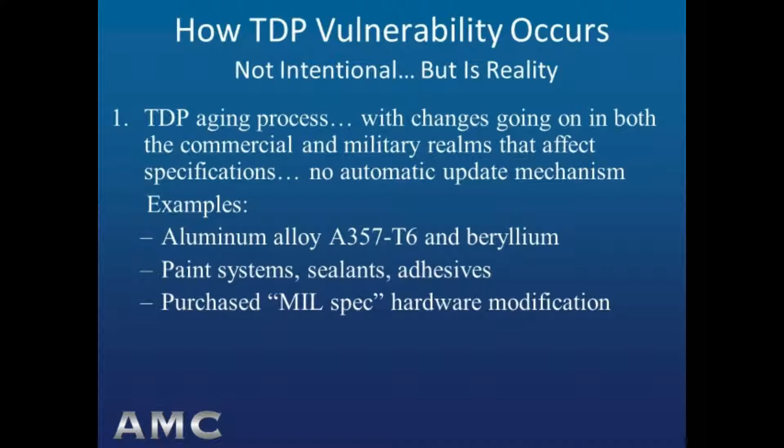The second reason for TDP vetting responsibility falling on cold start new awardees is the lost documentation phenomenon. Among casting dimensional requirements, especially and for any kind of casting, commercial or military aerospace, new designs or legacy designs, there are exceptions and waivers granted for the unique anomalies on the casting surface that don't find their way into drawing revisions and permanent records in the TDP. So, a cold start new awardee, the first article inspection lab, and even the engineering support activity may be unaware of a dimensional deviation having been acceptable in the past, but undocumented. It becomes a non-conformance on a newly produced legacy casting when it had not been a non-conformance in past buys, months or years ago.

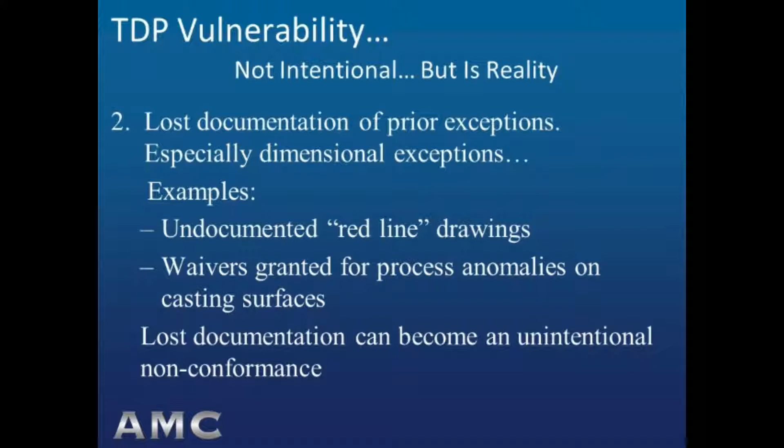As our teammate Keith Sturgill pointed out in his segments in both webinars 1 and 2, a cold start new awardee should assume nothing with regard to undefined dimensions, revised specifications, measurements before or after coatings are applied, commercial availability of specified alloys, definition of critical characteristics, and more. The purpose of these case studies, which are at a high level and brief, is to be specific about situations that have come up in first article inspections in the past and have resulted in non-conformances. The dimensional non-conformances are typically the most difficult to resolve and usually result in the new awardee having to resubmit a second first article at the awardee's expense.

Our CAST-IT teammate, Mike Gwynn, who specializes in casting design and the manufacturing engineering of casting designs to meet specifications, will summarize several casting non-conformance examples formulated generically, but based on actual DLA legacy casting first article nonconformances. Thank you, Julia. In the context of first steps to launch a legacy casting from a cold start by an awardee who is commonly now a machine shop, let's take a look at 4 case studies of situations that had a problem and what could have been done to prevent it.

Our first case study is a cast ductile iron engine cradle for an Army ground vehicle. The case study issue is which has priority dimensionally, an allowable 2-degree draft per a drawing note, or the plus or minus tolerance on a linear dimension specifically identified on the drawing and affected by draft.

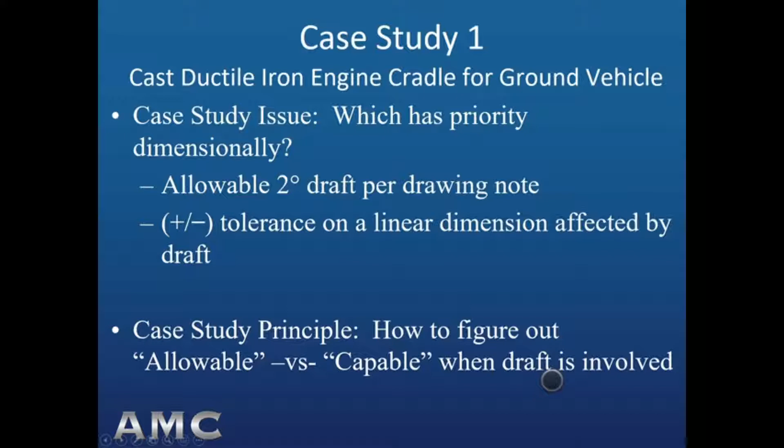And we'll also look at another issue that comes up. What about this? A drawing note that says draft to be additive, along with another note less specific about the tolerances involved in a specific dimension: unless otherwise specified, dimensional tolerances to be plus or minus some fraction of an inch. So let's begin looking at the details.

Well, here we have this engine cradle in an isometric view with a bounding box around it. It's about 24 inches wide, and the area that we're going to be looking at dimensionally from a standpoint of a critical dimension is the width of the cradle underneath the engine.

The 2 holes are for engine mounts with an elastomer between the engine and the cradle. And the width underneath the engine is an important dimension because there are accessories on the engine that we want to be sure that there is clearance.

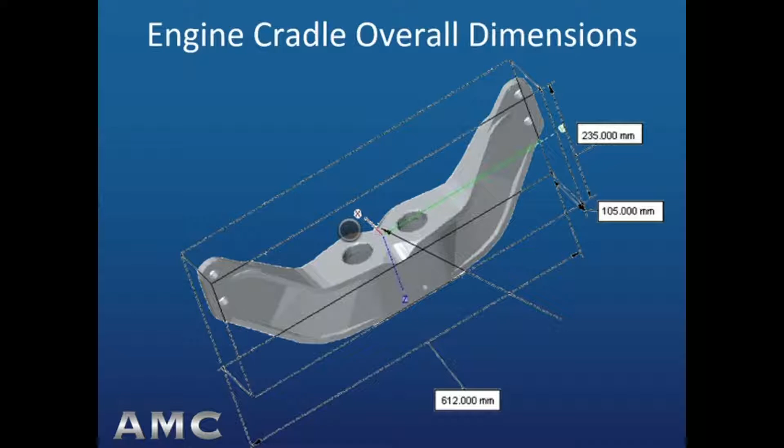If we look at an isometric view from the bottom, we see that there's a cavity at the bottom for lightweighting, and there's ribbing underneath. You can see also I-beam flanges on the top and bottom along the sides.

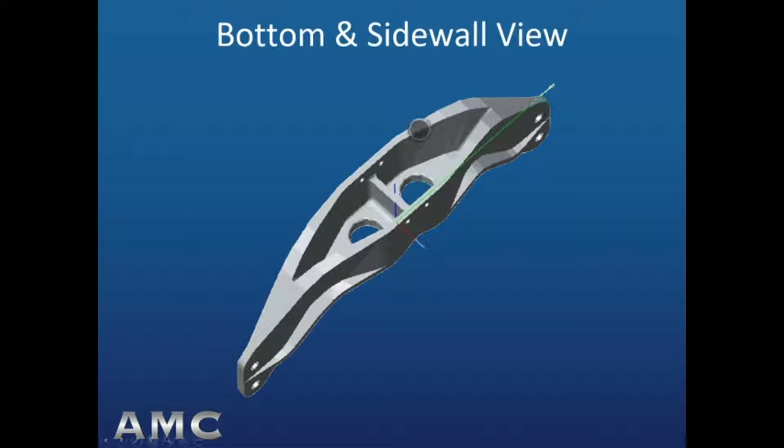So one strategy to make this casting would be to have a vertically parted mold to mold out that cavity in the bottom, but the sidewalls created by the I-beam flanges top and bottom create backdraft, and we'd have to have cores along the sides in order to accomplish a vertically parted mold. But there still may be advantages in taking a look at that approach.

So let's look at a vertically parted mold with those slab cores to fill in the sides where we have backdraft from those I-beam flange features. And here we have it. We have the casting now oriented with the pocket down below so that we can draw it out of the sand more reliably.

The pink line is the parting plane of the mold, and filling in those pockets created by the I-beam flanges top and bottom are the yellow features, which are slab cores. Those 4 slab cores, because of symmetry, can be formed by just 2 core boxes. So it's a fairly economical way to make the casting because the ability to mold out the bottom pocket has advantages.

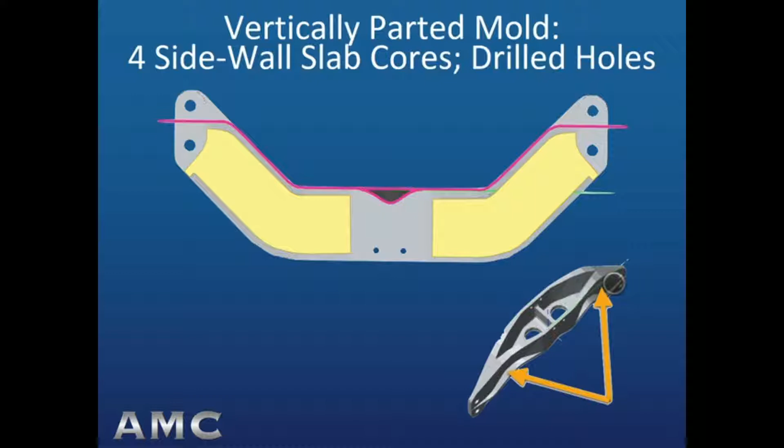Well, the dimension that we're interested in is across the bottom there of the view that we're looking at, which is actually the top where the engine sits on the cradle. And the draw length that creates the draft that affects that feature is 100 millimeters.

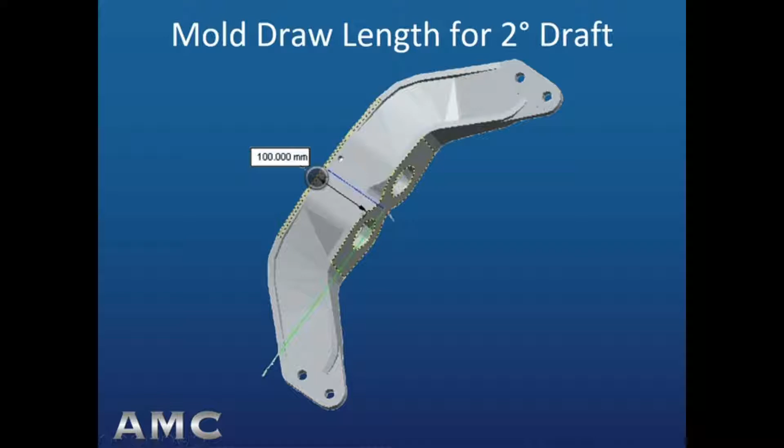So the draft offset for that 2-degree draft along that draw length of 100 millimeters is illustrated here, where we now see the cores. The cores have draft on them as well. And you can see in green the offset that is created by that 2-degree draft over the 100 millimeter draw length. And that's 100 millimeters times the tangent of 2 degrees, or 3.49 millimeters,

but it occurs on both sides of the casting. So we have a total width increase of the casting thickness of almost 7 millimeters as a consequence of draft alone. And that's against 105 millimeters plus or minus 4.

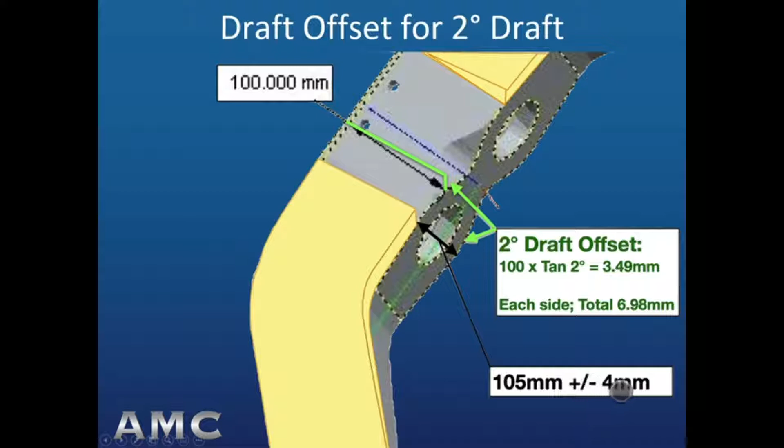In terms of tolerance capability for a casting like this, focusing on air set in the green box with well-designed and well-constructed tooling, we could get plus or minus 3 millimeters for a casting of this size in terms of mold capability, since the dimension is all on one side of the mold, being a basic dimension with no degrees of freedom added to the tolerance capability inside the mold.

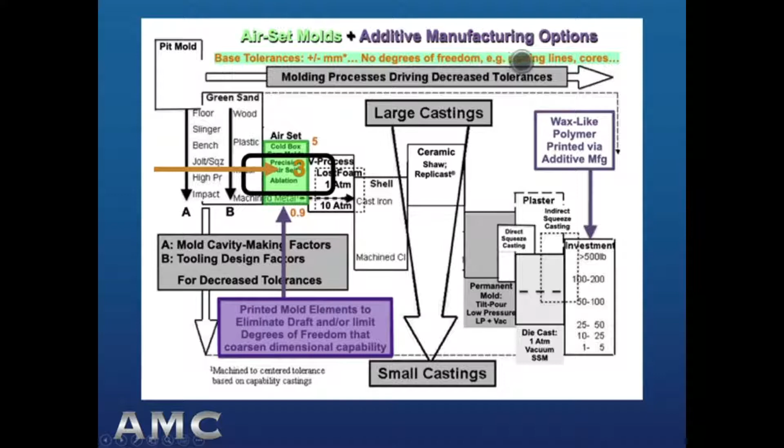So now we have, at best, the mold cavity capability dimensionally at plus or minus 3 millimeters on top of the draft that has already widened the feature by a total of almost 7 millimeters.

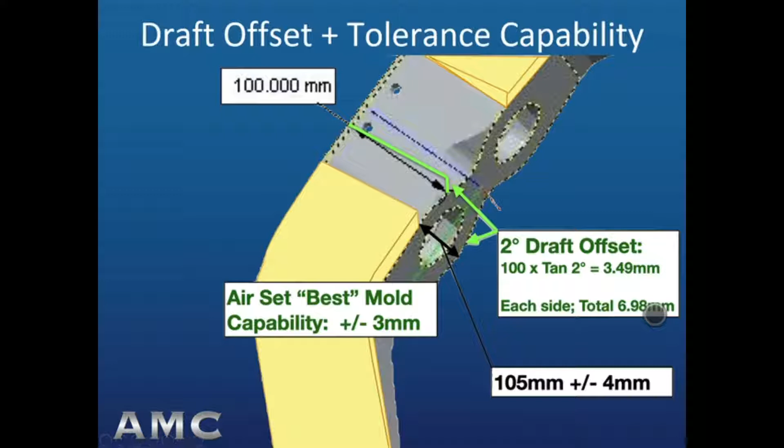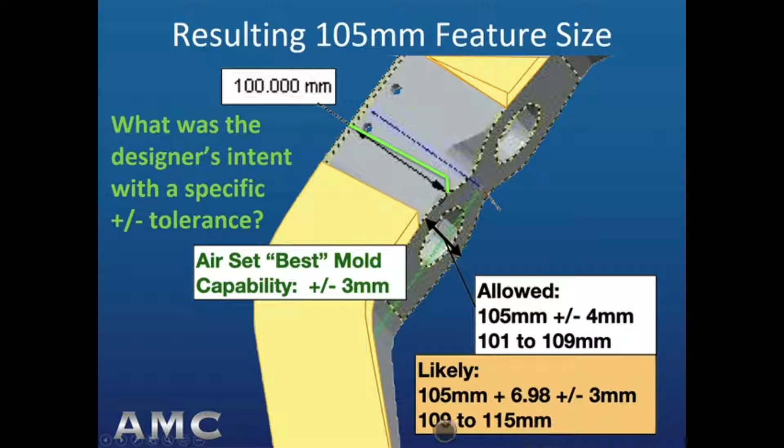So when we look at the resulting 105 feature size, we now see that we're allowed 105 plus or minus 4, which would be 101 to 109 millimeters, but it's likely we're going to wind up with 105 plus the 7 from the draft on each side, and then the plus or minus 3 millimeters of the mold cavity making process capability, or in other words, grand total of 109 on the small side to 115 on the high side.

That's not likely to be within the design intent of the engine cradle, where accessories and other clearance issues would be right below where the engine mounts on the cradle. Well, let's look at the other situation where we don't have a specific call out for that 105 dimension, but we do have a note that says draft is to be additive, and then the note that would cover the width of the engine cradle in this case would be unless otherwise specified plus or minus 4 millimeters.

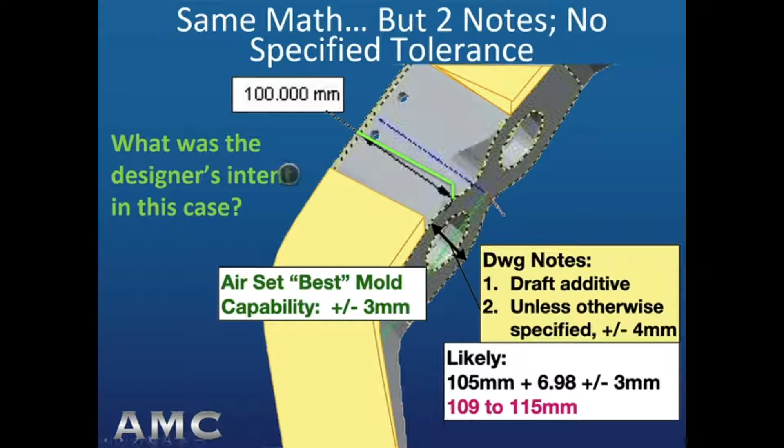So again, we have the same math. So we have the same situation in terms of the 109 on the thin side to a maximum of 115 millimeters across the top of the engine cradle, right where the engine sits upon it. So what's the designer's intent in this case? Well, when a designer puts draft to be additive as a note on the drawing, that's a structural design intent. The idea there is to make sure that walls which have structural capability as part of their design are not thinned down and lose their ability to carry the load case just because of the way draft was formed.

So in this case, we're looking at draft being additive as preferred structurally, but the designer's intent on the overall casting profile would not likely be pleased with the idea of 115 millimeters width right underneath the engine as it sits on the cradle. So our vertical tooling design option has a lot of risk associated with it for first article approval. We can be 95% sure that the 105 plus or minus 4 millimeters will fail.

And we can be more than 50% sure that our favorable interpretation, looking at those two notes in our favor for our vertically parted tooling design, that the draft additive is really a structural design issue, and then the just general otherwise specified plus or minus 4 millimeters is not specific to an engine clearance concern, but the engineer wasn't expecting a result that would be plus 11 millimeters on the wide side and plus 3 millimeters on the narrow side of any feature across the design.

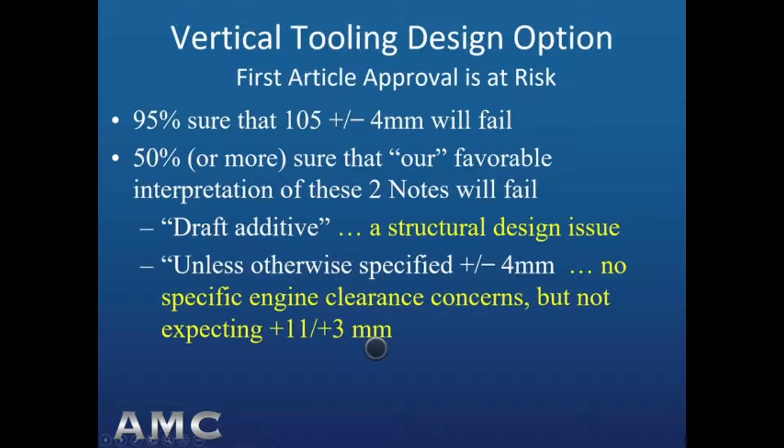Well, are there other tooling design options? What about a horizontally parted mold with a traditional core to form the center cavity and the motor mount holes, or horizontally parted with a 3D printed sand core? Let's take a look at that. Well, here's what that option would look like. The 2-degree draft still exists, but it's on a different surface. So we see the parting plane now of the horizontally parted mold cavity above, and then we see a slice through the mold cavity showing the lower half of the cavity and the parting plane in pink.

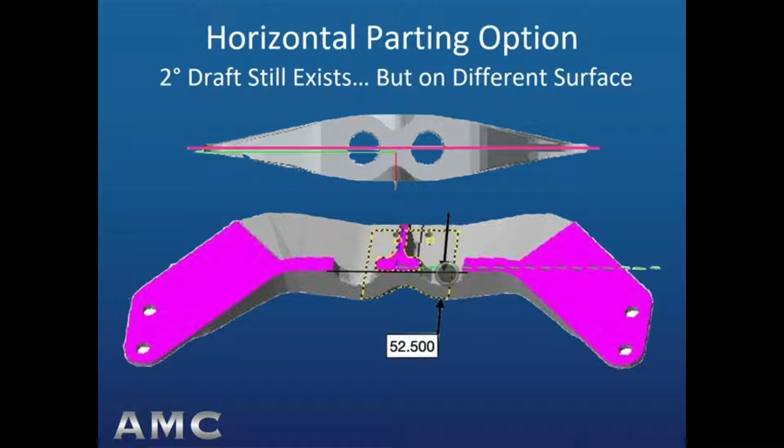And we now have 52.5 as the half of the dimension of the 105 that was a concern for us before. There would be draft on that surface, but that's not the surface that is of concern. The 100 millimeter draw length created a lot of draft that made that 52.5 on each side quite a lot larger. Well, now we don't have that issue. There's draft on that 52.5, but it's in the other plane. So the draft that does exist is going to be machined off because the 2D drawing calls for the motor mount holes to be spot faced, as we see there in green.

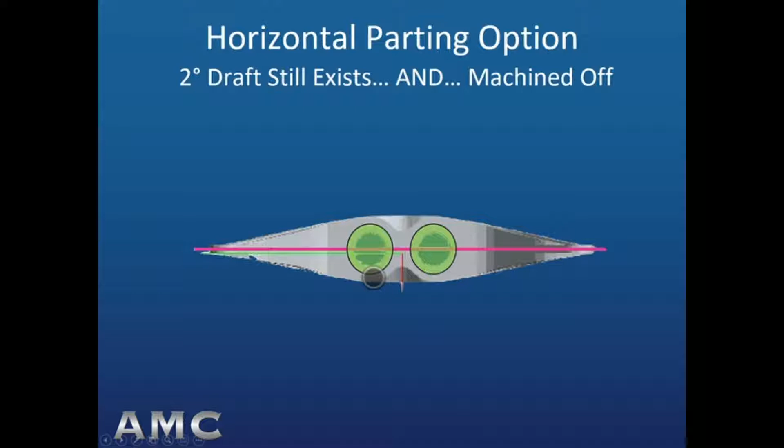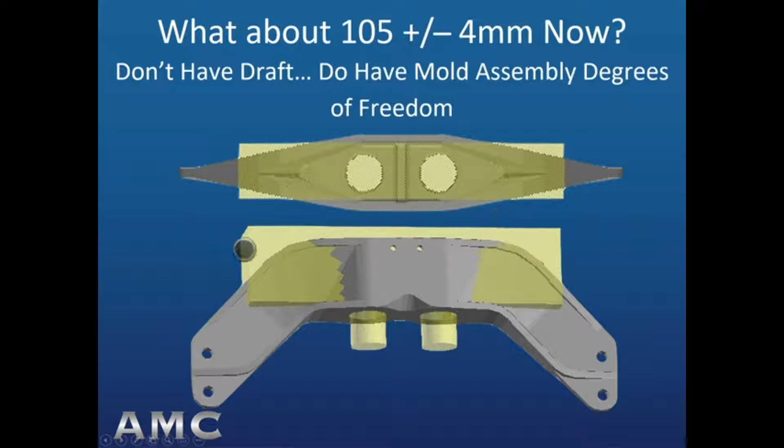And in the lower example where we have a top view that's been tilted a little bit, you can see the core that forms the motor mount holes and forms the inside cavity of the upper part of the engine cradle actually could resist the closing over of the top half of the mold on the bottom.

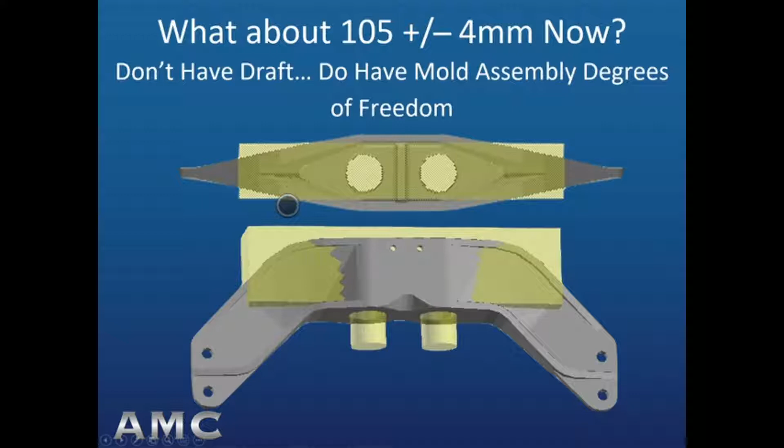So as a consequence of that close over and the parting plane, we have a coarsening of that 3 millimeter capability of the air set process with good tooling and a mold cavity of this size. So the consequence of that would be that we have 1.3 times that plus or minus 3 millimeter base tolerance capability, or plus or minus 3.9 across the parting line and across that core. And we're allowed 105 plus or minus 4. We don't have any draft involved.

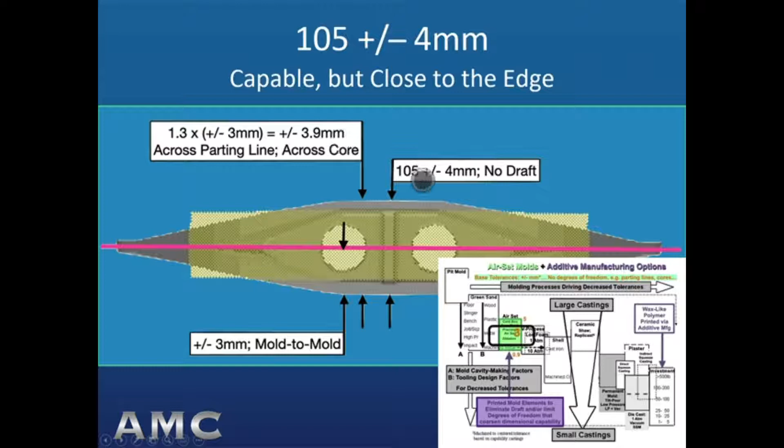And you can see that from our tolerance chart that we got our plus or minus 3 from the air set mold process for a casting this size with well-constructed tooling. So our process is capable, but at 3.9 of the 4 millimeter allowed tolerance, we're close to the edge. So what else could we do? We could do 3D additive manufacturing of that core. There would be no draft. There would be no degrees of freedom in creating a complex core, as we can see here.

I'll explain all that's involved, but in the upper view, you can see that in green now, because the 3D printed cores have kind of a greenish gray color compared to normally cores made in sand have kind of got a yellowish buff color. So we could wrap with the 3D printing process, since we have such great dimensional capability, so much geometry capability with the 3D printing process for cavities and reentrant angles and all kinds of offsets and geometry inside a core's geometry.

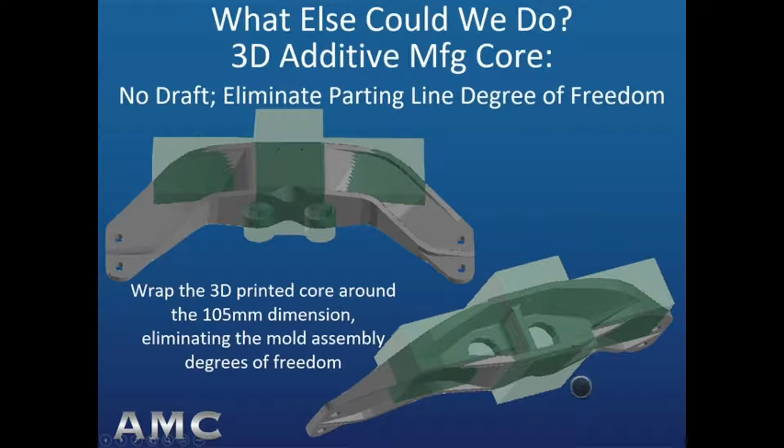We could wrap that 3D printed core around the 105 dimension and eliminate the mold assembly degrees of freedom entirely. And so that's what you see with kind of the center addition to the core's width, is it just basically wrapping around the outside of the casting to eliminate the possibility of the closing of the mold having an effect on that 105 dimension. So with a printed core, we have better tolerance capability. Now we're at plus or minus 2.

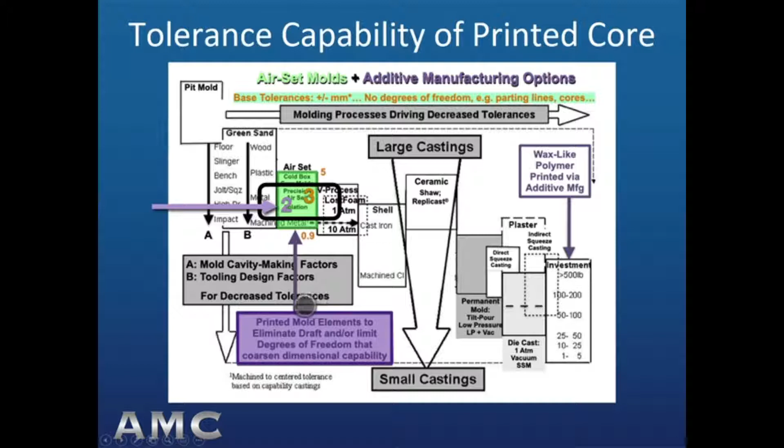So at this point now we have 105 plus or minus 4 allowed, and with the printed core wrapping around all of the important features, we have 105 plus or minus 2. So we have tolerance capability now with margin to spare. We have a robust situation, we might say, statistically. Well, one more thought. This is a legacy casting. We can't change the drawing. We can't change the fact that the motor mount holes on the top side of the casting are spot faced.

But if it were a new casting design, a little more geometry in a 3D printed core comes essentially at no charge. So why not increase the diameter of the core prints at the bottom interface between the casting and the mold cavity? And that's what I've expressed there in yellow, is the fact that the core print could get wider, and then that wider diameter at that point would essentially make what amounts to a spot face for the motor mount cushions or the motor mount bushings.

And with the tolerance capability of plus or minus 2 millimeters, that for an elastomer sitting against that surface is plenty good enough. And if it wasn't, you could take a cup grinder in the foundry finishing process and just kiss those surfaces with a circular cup grinder and make them for sure dead flat.

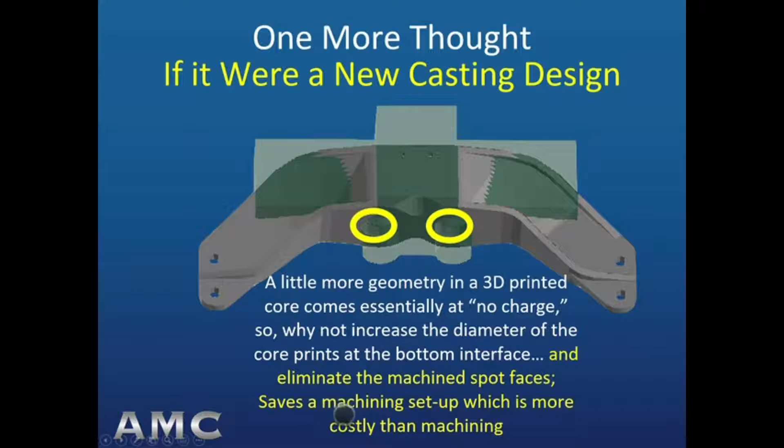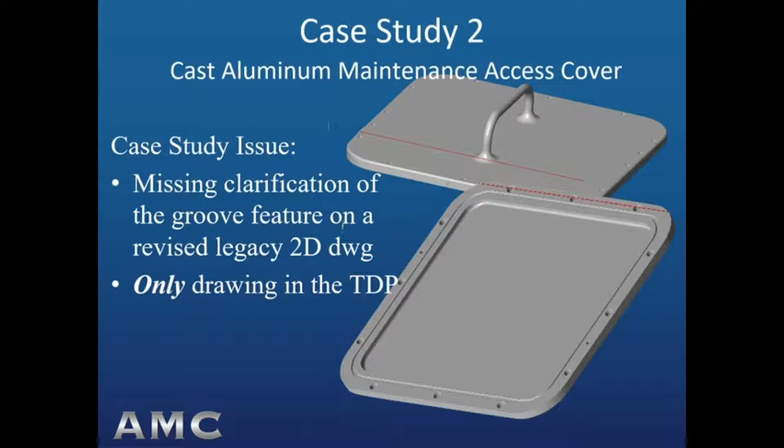Well, now let's take a look at another case study. This one is an aluminum maintenance access cover. And the case study issue is missing clarification of the groove feature on the revised 2D drawing. And it's the only drawing in the technical data package. So the drawing that's in the technical data package has a note that's missing on the revised drawing that was on the original drawing, but of course, a cold start new awardee would have no idea that that is missing, as well as the responsible engineering authority that approved that drawing when it was revised didn't notice it either.

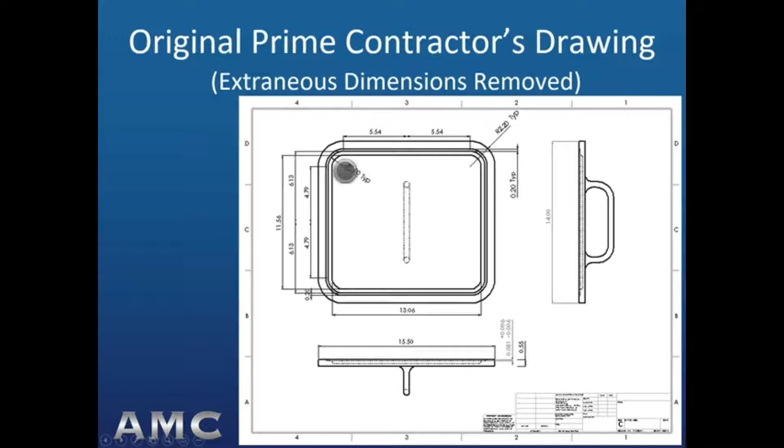So here is a drawing with some of the extraneous dimensions removed, and we'll take a close-up at the dimension of the groove in question. So we see here circled that the outer radius of the groove feature and the inner radius are shown as typical, and then the width of the groove all the way around is shown as typical on the original drawing, which we don't have.

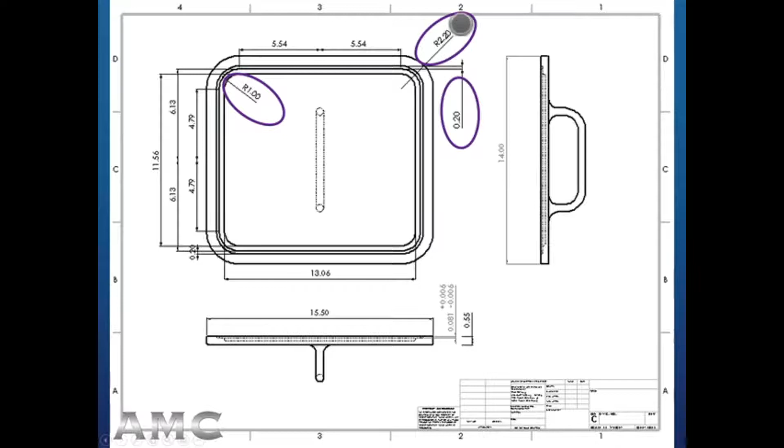What we do have in the technical data package is this, which is essentially the same drawing, but whoever did the revision for some other reason, perhaps a change in the anodizing specification or some other unrelated dimensional issue, was the reason for the drawing update. But in the process of making the drawing update, the typical note on those 3 dimensions was accidentally, apparently, left off.

But it's the only drawing we have, and as we've talked about, particularly in Keith's part 2 of this webinar series, the technical data package is what it is, and as the cold start new awardee, you are obligated to comply with the TDP without regard to whatever may have been in the TDP in the past. That's not known. So what would be the logical course of action for a cold start new awardee?

Well, from the size and scale of the hand-drawn groove, it's obvious that the designer intended for the groove to have a constant width around the perimeter and in the corners. Knowing the purpose of the groove is to seal the cover against the housing, a constant width elastomer seal, like a big O-ring, just basically rectangularly shaped, would be placed in the groove. So differences in the groove width in the casting might compromise the seal efficiency.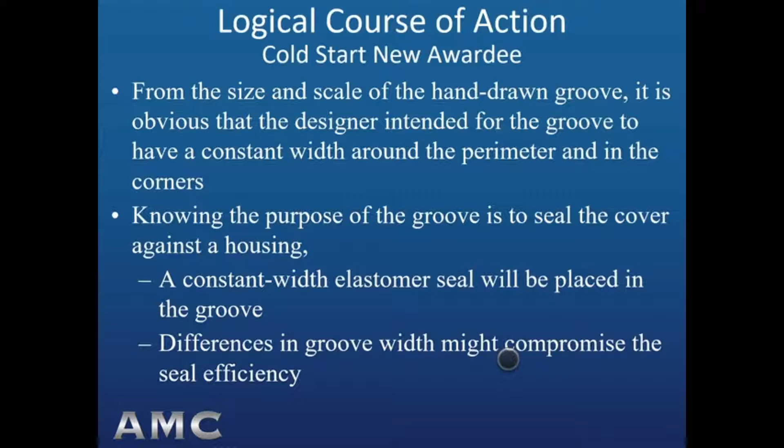So it's obvious that that groove needs to be the same width all around the corners and on all 4 sides of the drawing. But pursuing an engineering change to the drawing through the contract officer to the cognizant engineering authority at the governing DoD site would evaporate the first article production lead time. So for everyone's benefit, proceeding dimensionally with what is obvious seems to be the prudent choice.

Well, what actually happened? The first article was conditionally approved, but production couldn't begin until the dimensions of the groove were clarified. Well, you can't clarify the dimensions without a revised drawing. So the choice is, do I wait now as the cold start new awardee, or do I wait later? Well, the cost of lead time is the same, but the cost of preparing a new first article for the Defense Contract Management Agency's approval at the production site is borne by the new awardee. So it's less costly to wait at the outset.

Now let's look at case study number 3. It's a cast ductile iron gear carrier for a 4x4 transfer case on a vehicle that's somewhat larger than a Humvee, but of similar size. The casting is about 16 inches in diameter and about 16 inches tall. And the case study issue is a missing go-no-go gauge drawing for the aggregate spline tooth profile. In other words, a go-no-go gauge that goes down in among the splines completely to verify that the spline geometry is not only the correct diameter, but the tooth profiles are correct.

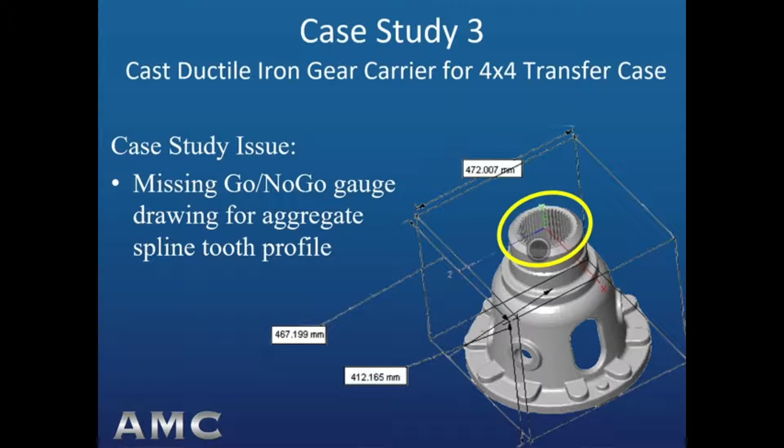Well, what's different about this one? We just learned from the missing typical dimension that if we just get the drawing and make the go-no-go gauge, that's the right thing to do. But there's a new inspection technology especially helpful for castings. As we've learned, castings are more 3D with more 3D surface anomalies than any other engineered product form, metal or non-metal. And this new dimensional inspection technology is powerful, and it's catching dimensional inspection authorities flat-footed.

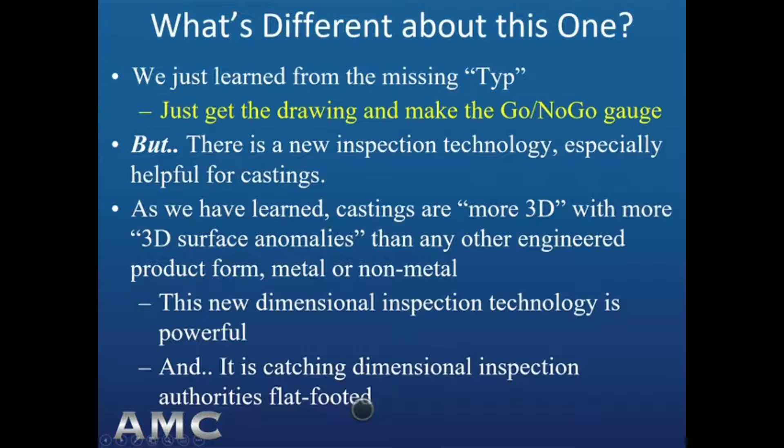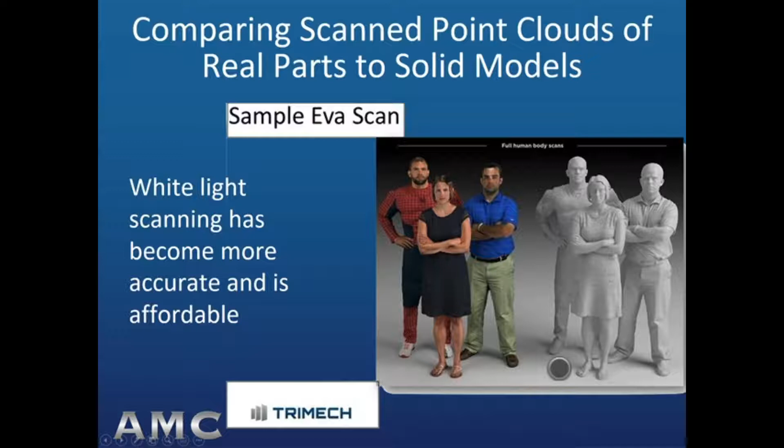So here we see a white light scan. Most laser scans, which has been the existing technology, are expensive, very capable, very accurate, but white light scanning has become more and more accurate and is affordable. And for comparing scanning to solid models, there's software. This is an example of that software, and this is on a 3D basis comparing a scan to a solid model of a crankshaft. The software enables overlays of a scanned point cloud on top of a solid model for a quick 3D color-coded inspection result.

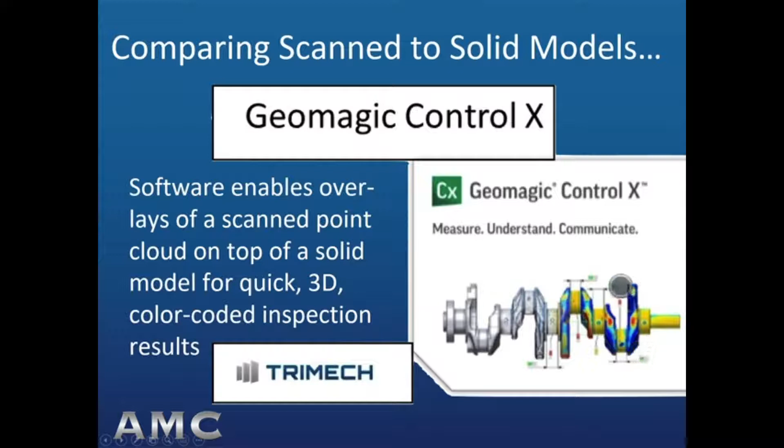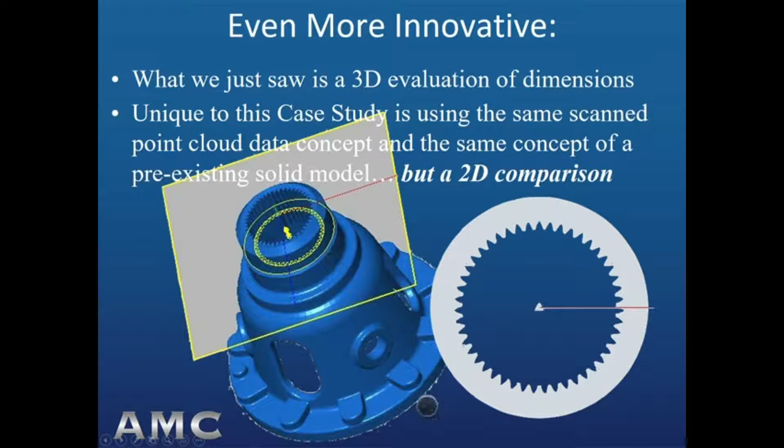And even more innovative, what we just saw is a 3D evaluation of dimensions, but unique to this case study is using that same scanned point cloud data concept and the same concept of a pre-existing solid model, but a 2D comparison. So here we see a slice through the spline feature of the gear carrier, and now we see the slice as a 2D slice for comparison with a scanned point cloud. So the same software can compare a slice through the point cloud that matches a 2D view from the drawing.

So this is really significant, in my opinion, with respect to legacy parts that have a 2D drawing, because with a 2D drawing, you don't have the 3D aspect of checking dimensions. You're always looking at 2D representations of 3D geometry on the drawing in the 3 views or in special sections or detailed views.

So basically, to be able to represent on a 2D basis with the point cloud what you see on the drawing as drawn in 2D is a pretty significant application of this scanning software and the overlay software. So applying this to a legacy casting from a 2D drawing, yes, on gear teeth such as this spline.

It was unsure if what was presented in the 2D point cloud versus the model slice was fully understood by the inspection lab. But the inspection lab's objection was the comparison was made with an unapproved solid model, and that's right. However, all solid models for cold starts are unapproved. Only 2D drawings exist. So what would we at CAST-IT recommend?

Well, we'd recommend that the inspection lab, seeing the 2D slice comparison of the cloud slice versus the solid model slice, will lay out on the actual first article casting the tip, root, and pitch diameters on that first article casting spline. If those match the 2D drawing, well then the tooth profile is going to be acceptable, and then accept that scan result, which is even better as a result, and approve it.

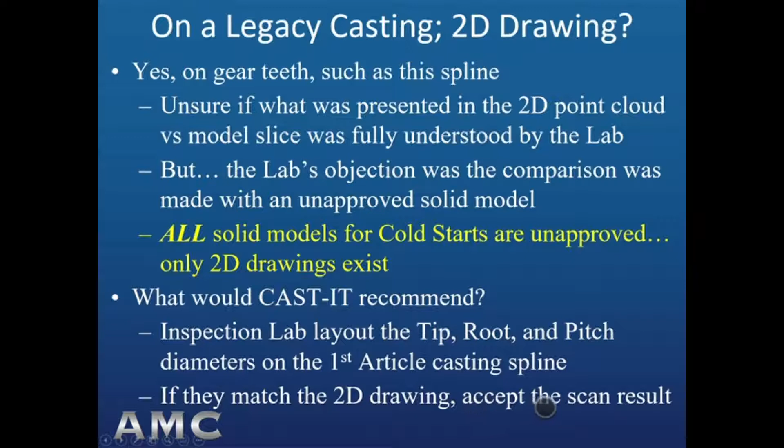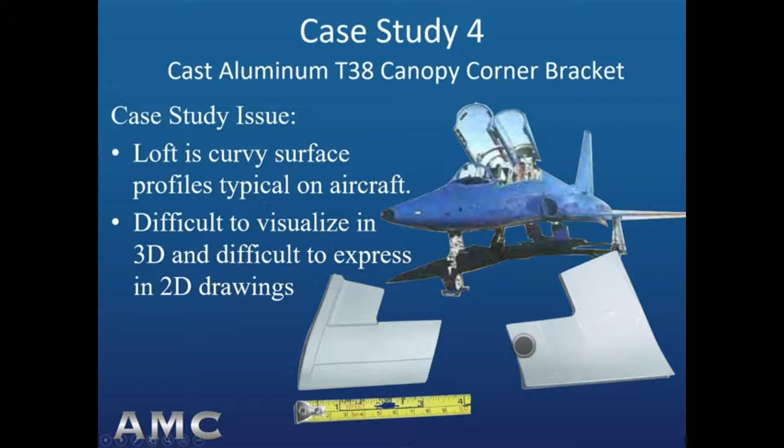And you can see that in the 2 views, top and bottom of the corner casting, that the loft is on the 3D basis. All 3 planes have curvature. A machine shop was the initial cold start awardee, and the part seemed simple, not knowing the complexity of 3D loft. So to procure the casting and drill 4 canopy attachment holes seemed like a no-brainer, and there were 50 castings needed, which was unusual for a legacy DLA casting procurement.

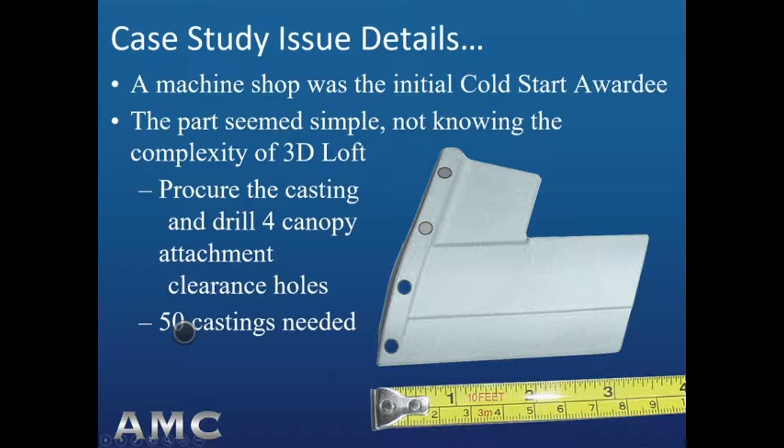Well, there's loft data problems on that 2D drawing. The corner bracket has loft in 3 planes, which is common on aircraft surface profiles, but that is difficult to represent on a 2D drawing. So the draftsman had some incorrect individual data point positions, and it's difficult to detect that that data may be incorrect unless you're familiar with loft on 2D drawings.

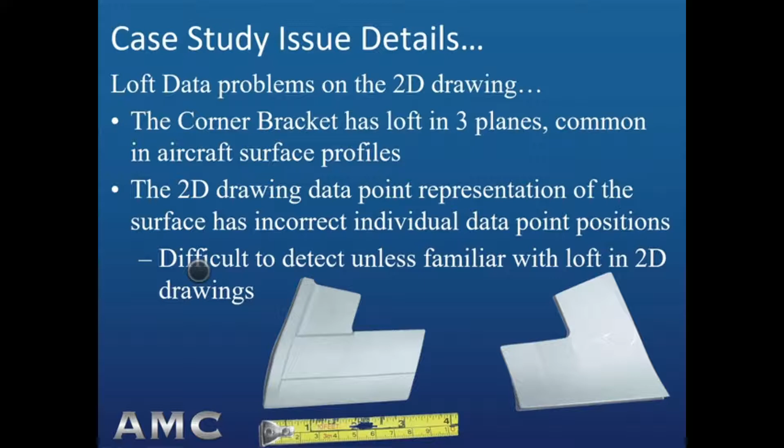The machine shop, unaware of possible profile errors in individual 2D drawing loft data points, built a solid model, procured an investment casting, built a machining fixture, drilled the 4 clearance holes, submitted the first article, and it was rejected. They came back and tweaked the solid model based on the rejection and some of the dimensional feedback that they got. They resubmitted at the machine shop's own expense, which is the problem if you missed the first article.

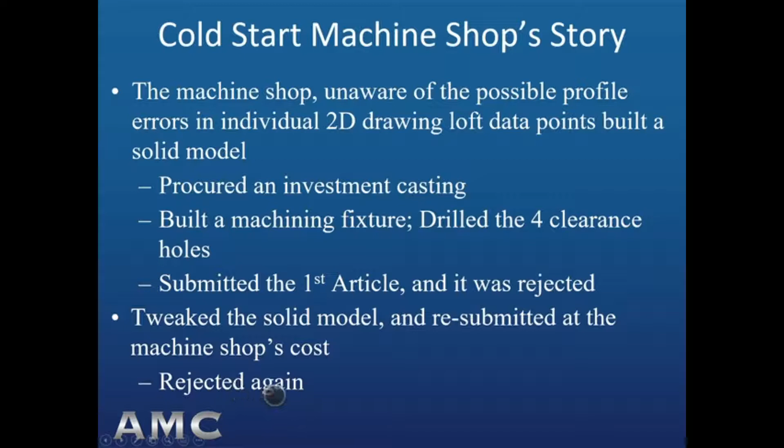As we've been talking in these 2 webinar series, it's really important to get the first article correct, because that second one, as the cold start new awardee, is on your nickel. Well, it was rejected again. So what was DLA's situation? The 50-piece requirement being unusually large for a legacy casting requirement, the Air Force had T-38 aircraft in need of the brackets. So DLA came to Castit for assistance.

You guys know Gary Burrow now, our mold cavity tooling builder expert, undertook a new contract for the 50 pieces. The significance of this case study is that Gary did what he professed in webinar 1 and part 1 of this webinar 2 series. So let's follow what Gary actually did. Well, the cold start H.A. Burrow pattern story. Gary is the 4th generation pattern maker. Now we call him mold cavity tooling builder because we do so much important mold cavity building with additive manufacturing technology. So pattern making really doesn't describe what someone like Gary does.

So he's the fourth generation of the H.A. Burrow pattern organization. Originated in Southern California, serving metal casters in the aerospace, military, and commercial business sectors. Now Gary's located in Montana. A separate business, not a metal caster, serves all kinds of alloys and all kinds of mold cavity types. A separate business, not a machine shop. Chooses machine shops on the basis of casting machining expertise and machine tool types.

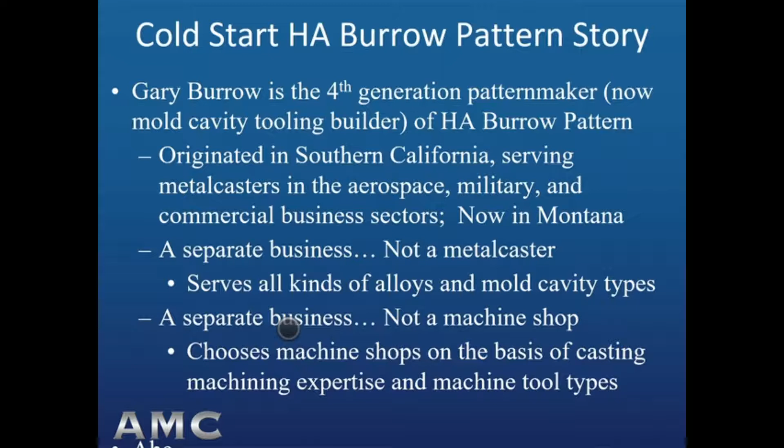For decades, Burrow Pattern has built casting tooling for aerospace loft profiles such as this, and still builds tooling for a wide range of alloys and mold cavity making processes, production castings, commercial legacy castings like critical structural castings for rides in the original California Disneyland Park, and of course DLA legacy castings like this one.

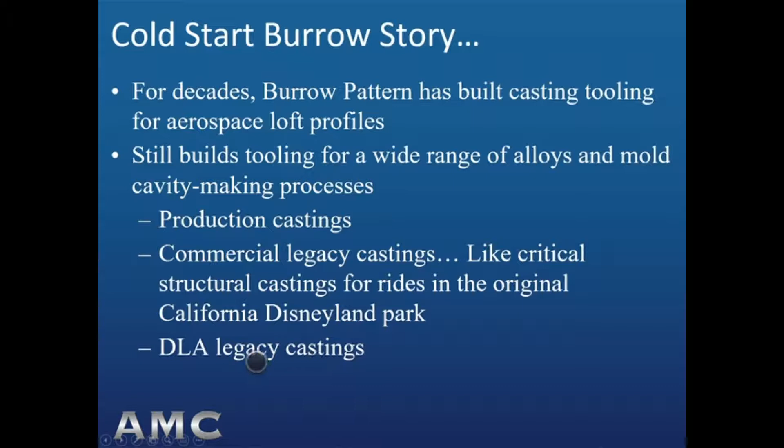As our Cast It webinars 1 and 2 have been professing, it's a mold cavity tooling builder that has the technical expertise that is the foundation of a successful first article launch. Builds the 3 levels of solid models necessary to replicate the original 2D drawing and build all the tooling. Estimates the pattern maker's contraction, which is fundamental to dimensional compliance, and has access to additive and subtractive manufacturing technologies to build tooling and build more accurate mold cavity elements.

Specifically, Gary built the first solid model replicating the 2D drawing, making judgment calls on apparently erroneous loft data points and correcting them based on what he could surmise about the erroneous data points. Then the first solid model, which has no pattern maker's contraction rate built into it and no attachments for the mold filling process, Gary used that first solid model to create what we call a naked solid model to print an SLA QuickCast 3D pattern of the part, not to make a casting, but to check the 3D lofted surfaces as he had created the 3D model from the 2D data.

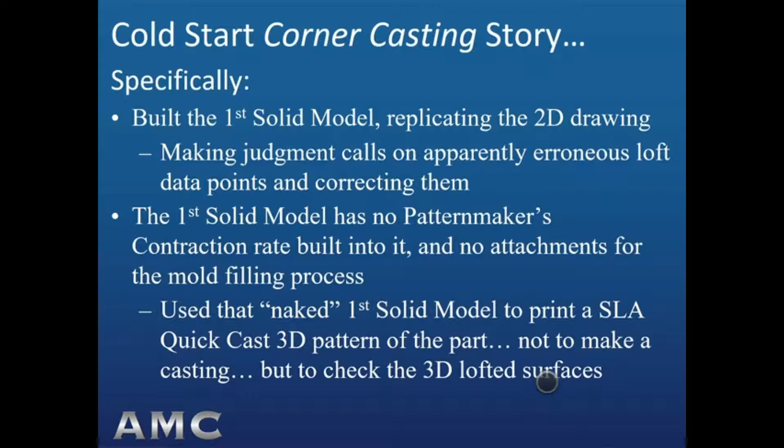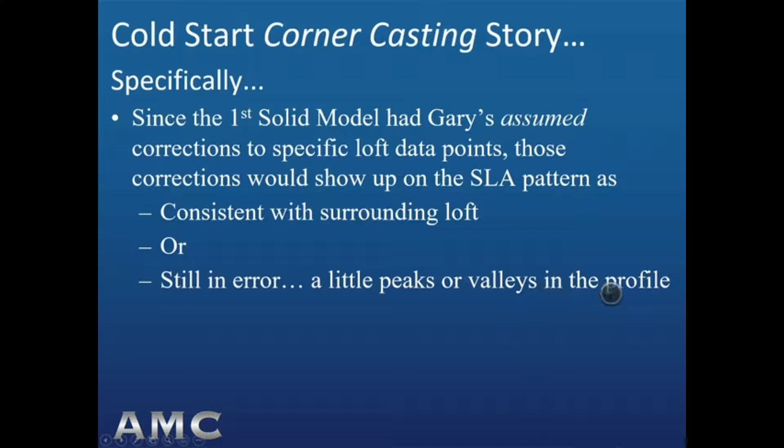Since the first solid model had Gary's assumed correction to specific loft data points, those corrections would show up on the SLA pattern as consistent with the surrounding loft or still in error with little peaks and valleys in the profile. So based on CMM, visual, and tactile evaluation of the SLA pattern's 3D loft profile, Gary adjusted the first solid model for loft corrections.

Then, in consultation with an investment casting shop, built the second solid model with pattern maker's contraction added for the 356 specified aluminum alloy. No additional contraction rate was added for wax, since the patterns for the investment process would be made from direct printed SLA QuickCast. And then added the contact geometry for the investment tree.

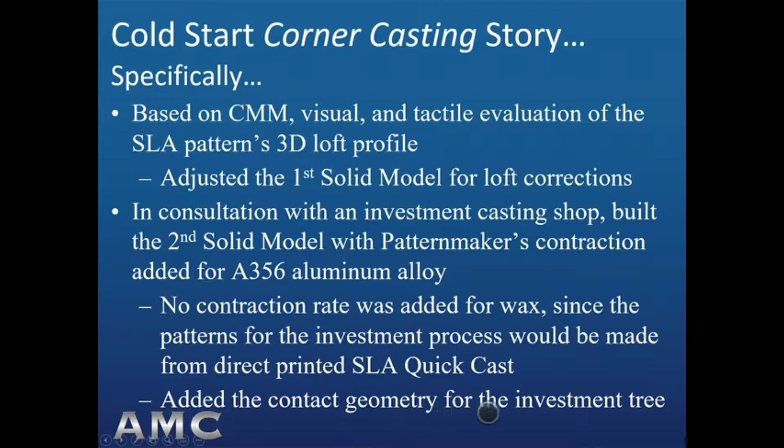Gary had another separate business, an additive manufacturing 3D printing source, print a few SLA QuickCast patterns for casting prototypes and hopefully a first article casting. The SLA patterns were given to the investment shop and prototypes were cast. CMM checks verified that the second solid model with the pattern maker's contraction added was correct, and a first article unmachined casting was prepared.

At this point, having finalized the mold cavity making process, Gary would ordinarily build the third solid model, remove the pattern maker's contraction, add the markers from process interface geometry, the gating, risering, and venting contact areas that will appear on the surface of the actual first article casting after those have been cut off and ground down flush and media blasted. So those would be the in-gate contacts, the riser contacts, and the vent contacts in the normal processes. In this case, it would be the contact for an investment casting of the investment tree.

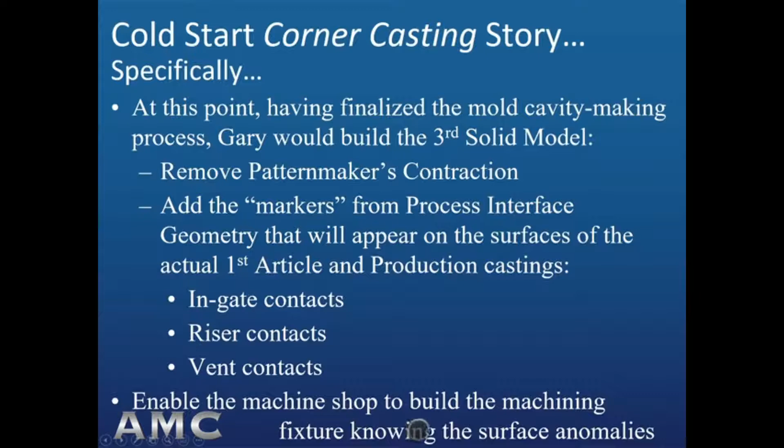And that would enable the machine shop to build the machining fixture knowing about those surface anomalies because they would show up on the solid model. Well, since some of Gary's machine shop partners are in other states, the third solid model is critical in communicating what the actual as-cast surfaces will look like.

And here we see what we're always talking about through this entire series of part 1 and part 2. You have to be careful, if you're a machine shop, of these surface anomalies that come from the mold cavity making process. Investment castings are not perfect either. Even with pattern maker's contraction, you can have dimensions that aren't centered, even though it's a highly accurate process, but the metal has to get into the mold cavity somehow.

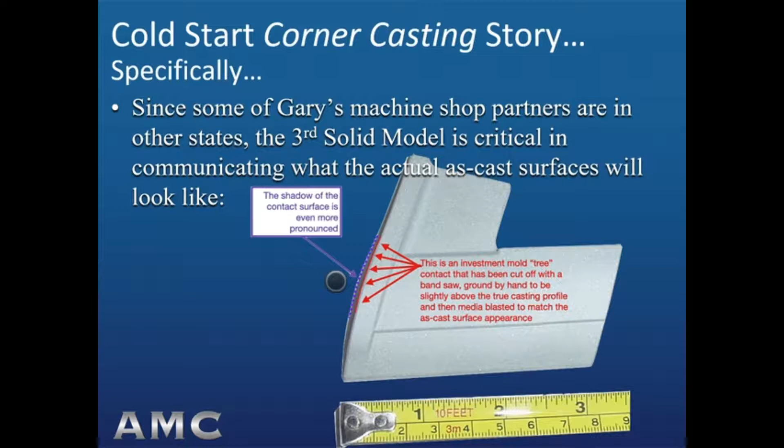And what you see with the red arrows, and you can see even more so with the shadow of the lighting of the casting when the picture was taken, there's a raised area about 1 millimeter high of the investment tree contact on that casting, which was cut off with a bandsaw, then lightly ground to be near the casting surface, but a little higher, and then media blasted. So in this case, the machine shop was a local Montana source, and here's what Gary and that source discussed: the machining fixture design and targeting.

Well, what does that bump mean in machining fixture design? You can't target against an area in which a process interface marker like the investment tree contact would exist, because that bump is going to be a millimeter, as it shows in this particular case, has some width, probably the total width of that bump at varying elevations is about an inch, maybe just a little over.

Well, the next casting might have a bump that's only 0.5 millimeter high, and then the one after that might have a bump that is 1.5 millimeters high. So if you target against that surface, not knowing that it's there, then the 4 holes are going to vary in hole position and be rejectable, because you can't stand a 0.5 millimeter to millimeter and a half difference from casting to casting on hole position.

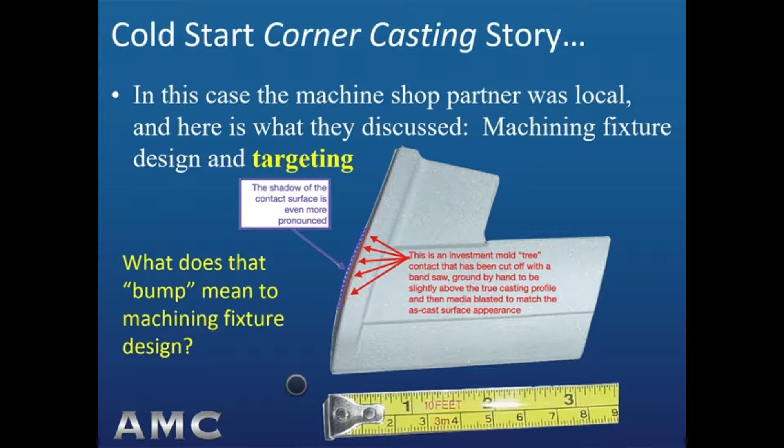So knowing that those bumps are there is really critical to the design of the machining fixture when machining castings. So what happened? The investment shop completed preparation of the first article casting and it was given to the machine shop, who set up on the casting aware of the investment tree contact area, targeted elsewhere, and actually clamped against it, which is okay. It's okay to clamp against a process interface marker, just don't target against it.

And then drilled the 4 clearance holes, which were very consistent from casting to casting. The machined first article was submitted and approved the first time. 50 castings were produced and used with no complaints. So that's what these principles that we have been discussing throughout the Webinar 1 and Webinar 2 series look like in case studies.